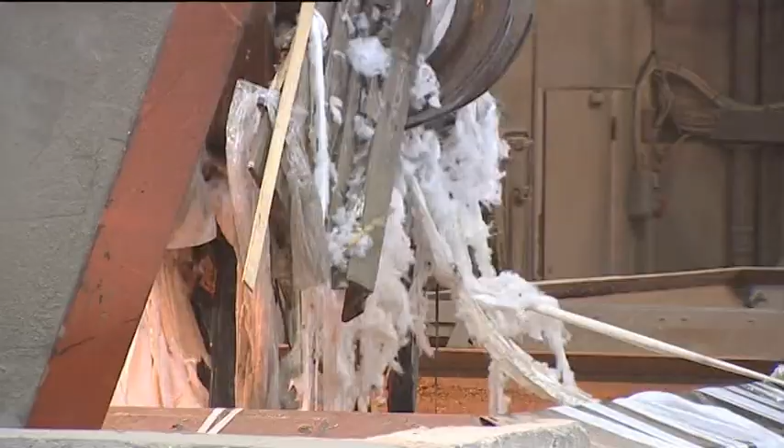There are also many waste materials which can be reused or recycled. Such waste has a value and should not be burnt. Where incineration is the best solution, it is vital that the waste is burnt safely and efficiently, at a high temperature and with a sufficient supply of oxygen to ensure complete combustion of all toxic components, and that the combustion gases and particles are filtered and separated before the clean exhaust gas leaves the chimney.

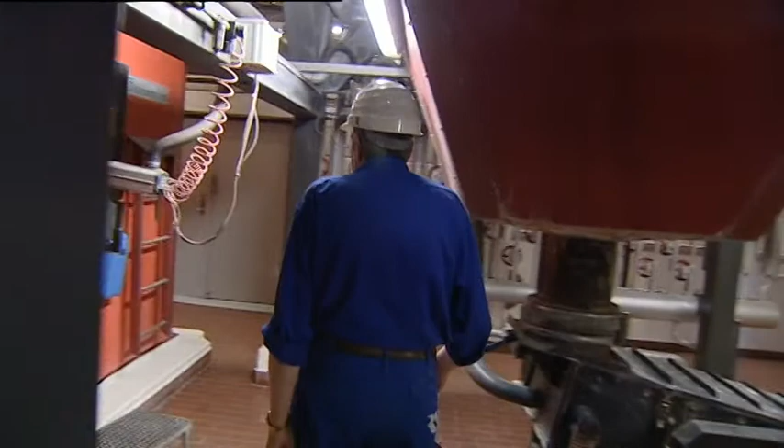Renosyd operates an incineration facility in Skanderborg. This is a combined heat and power generation plant. The heat energy from the incineration process is used to produce both electricity and hot water for district heating. The facility comprises two furnaces. The first was built in 1984 and the second was added in 1992.

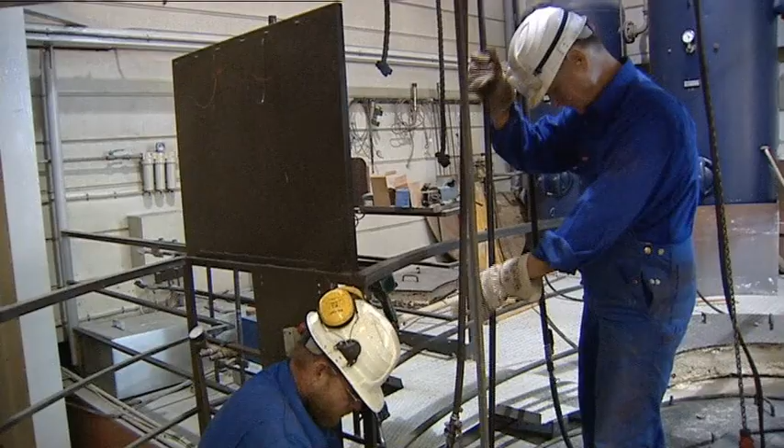The facility is continually upgraded to comply with the increasingly stringent requirements for the efficient and environmentally responsible incineration of waste. For the local community, this approach represents an annual saving of approximately 22 million litres of oil or 33,000 tonnes of coal, which would otherwise have been consumed to deliver an equivalent supply of electricity and district heating energy.

The incineration plant supplies electricity to approximately 4,500 households and district heating to approximately 6,000 homes. And because the waste would be burned anyway, the cogeneration approach represents an annual reduction of CO2 emission by 66,000 tonnes.

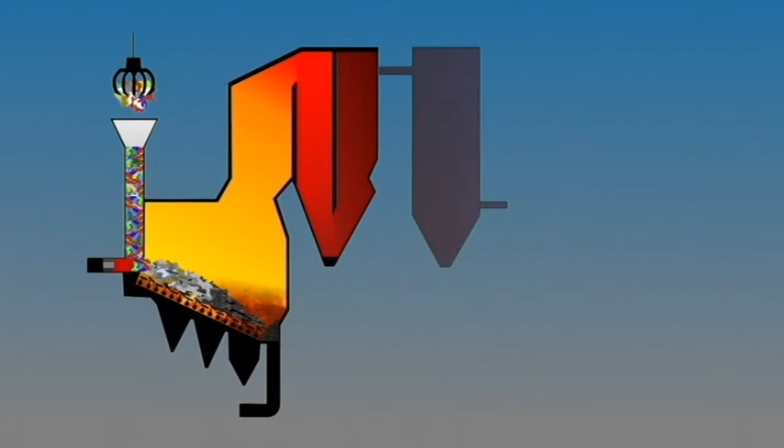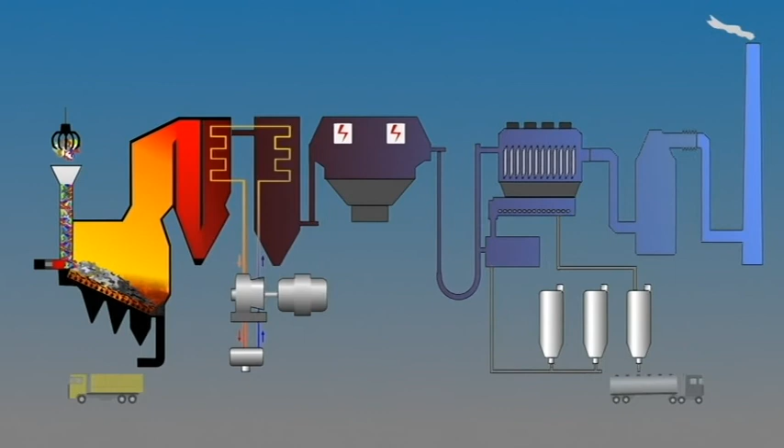An incineration plant is essentially a big furnace, with many ancillary systems to control and monitor the combustion process, and to limit the emission of toxic gases and particles in both the exhaust smoke and the residual ash. To ensure a clean and efficient combustion, it is necessary to keep the furnace burning continuously. Therefore, the facility operates 24 hours a day.

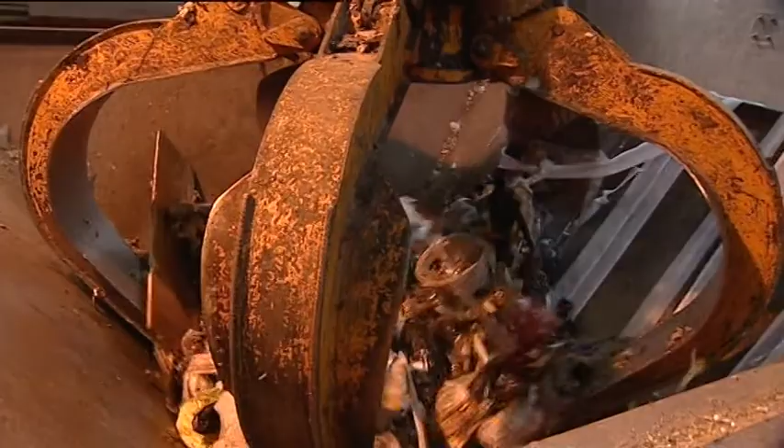Approximately half of the waste for incineration comes from domestic households. On their way in and out of the facility, the refuse trucks are weighed so that the weight of the refuse received may be logged.

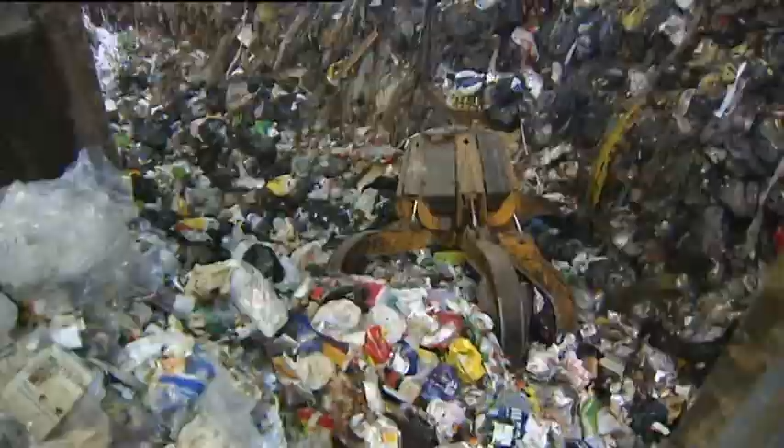Though refuse is only delivered during working hours, the furnaces run continuously. Therefore, the waste is first tipped into the silo, where there is capacity for several days' incineration, so that operation may continue during weekends and public holidays.

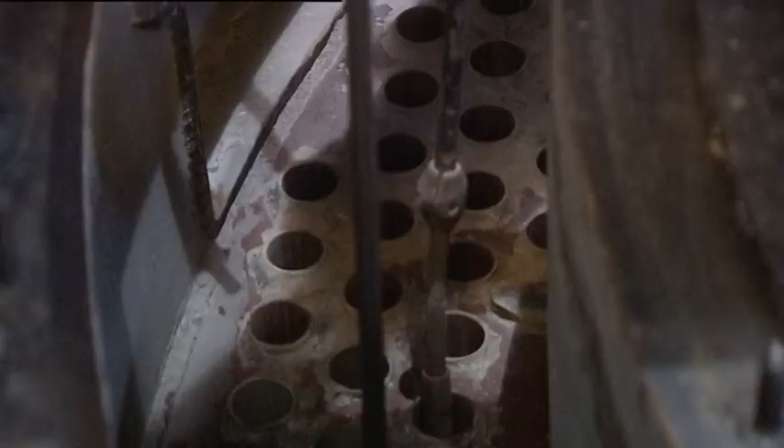The plant is shut down for maintenance for a week or two each summer, always at a time of low demand for district heating. Large quantities of auxiliary fuel, typically oil, are necessary when restarting the furnace after maintenance shutdown. It takes several hours before the required temperature for incineration is achieved.

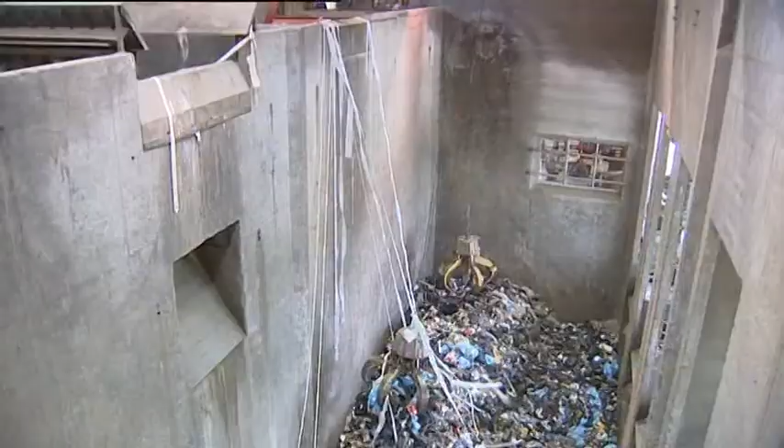Domestic waste must be sorted at source by the householder, so that only materials that are suitable for incineration are put into the refuse container for collection. Almost all domestic refuse goes directly to incineration. Therefore, unlike many industrial operators, we're unable to control the quality of our raw material. Instead, we must trust our suppliers, the public.

A battery that is delivered along with household refuse is a problem. Batteries do not burn well, and we must use extra resources to remove the toxic residue from our system. It is for this reason that waste management companies like Renosyd make an effort to persuade private householders and businesses to sort their waste, so that only suitable materials are incinerated.

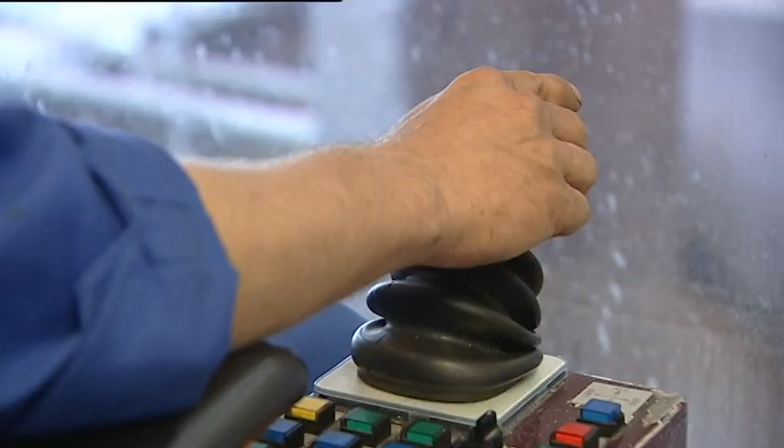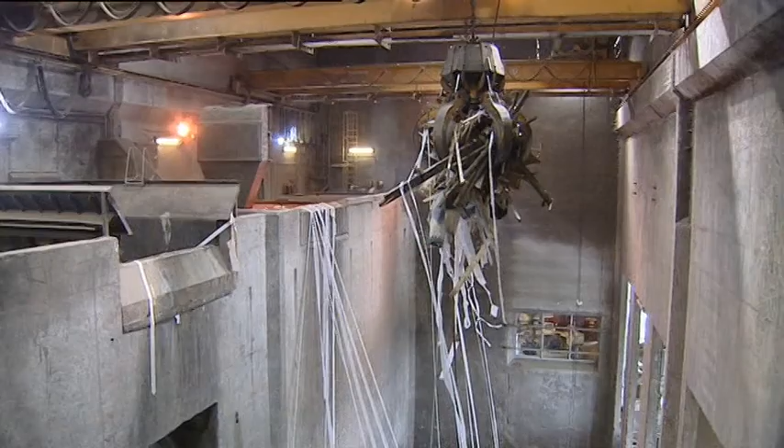The operators in the control room have an overview of the entire facility, with the aid of 2 grab cranes. They are able to move the refuse around in the silo and onwards to the furnaces. The furnace must be fed continuously, and the different types of waste in the silo are mixed, so that easily combustible material such as wood is mixed with wet household refuse to achieve the optimal mixture for an efficient incineration.

The refuse is lifted by the crane from the silo to a loading hopper at the top of the furnace. Once it passes into the furnace, it is impossible to see, as the furnace is enclosed because of the high temperature.

The refuse falls onto a moving grate, and the grate elements oscillate alternately to spread the refuse evenly and move it downwards through the furnace. A primary blower underneath the grate forces air up through the furnace, bringing the temperature up to between 1000 and 1200 degrees centigrade. The refuse dries rapidly and burns easily.

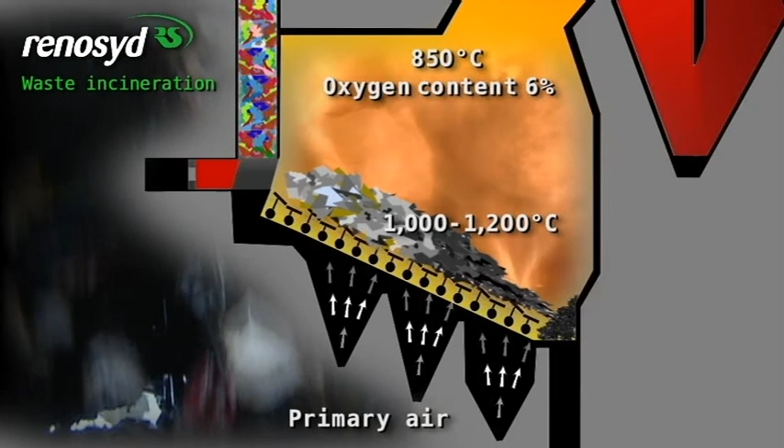Under combustion, the refuse gives off many toxic gases and particles. The furnace is designed to maintain a combustion gas temperature exceeding 850 degrees, with an oxygen content of 6% to ensure complete combustion of the gases before they leave the afterburner zone above the furnace. The combustion gases are pulled onwards through the system by suction fans.

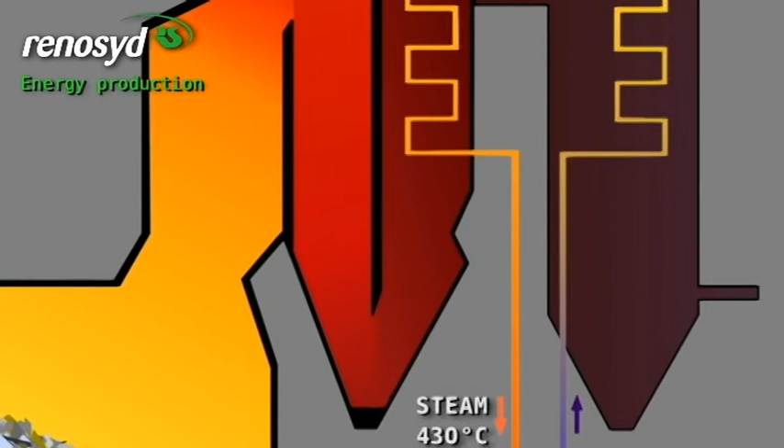The hot gases then pass through a boiler, a system of vertical chambers surrounded by water pipes. Here the water is heated to steam with a temperature of approximately 430 degrees, and under high pressure is fed to a turbine. The high pressure steam drives the turbine, which in turn drives a generator that produces 3 megawatts of electricity.

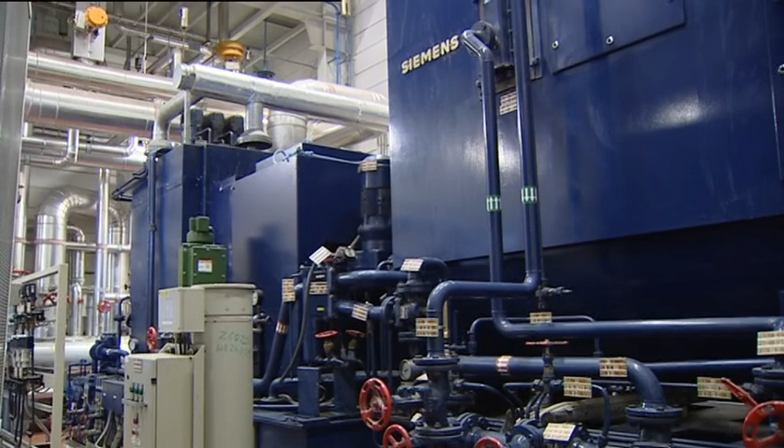The generator is connected to a transformer from which electricity from the incineration plant is distributed to the public electricity network. After passing through the turbine, the steam is piped through a heat exchanger, in which the steam heats water from Skanderborg's district heating network.

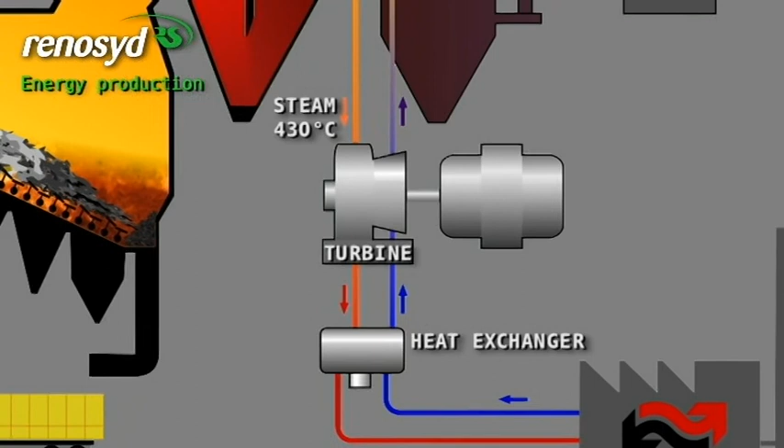The district heating water is heated from approximately 40 degrees to approximately 90 degrees, before it is pumped out to households in the town. The steam is cooled in the heat exchanger and is condensed to water again, after which it is pumped back into the boiler.

The water used in the incineration plant is rainwater recovered from surface drains around the facility, and almost all the water discharged from the facility is recovered and used again.

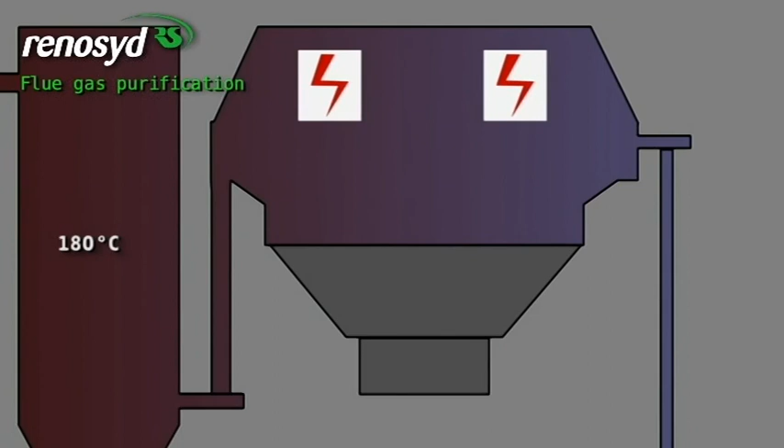The combustion gas leaving the boiler has now cooled to around 180 degrees. The gas still contains many toxic gases and fine particles, which must be removed before the flue gas stream is released into the atmosphere. The gas flows through an electrostatic precipitator, in which particles and smoke are removed from the flue gas stream by an induced electrostatic charge.

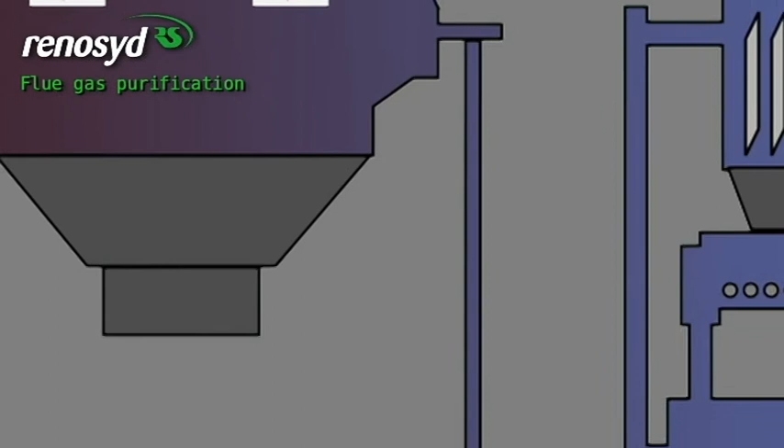The flue gas stream is then passed through a reactor, in which lime and activated carbon are added. The lime absorbs acids in the flue gas, particularly hydrogen chloride and sulfuric acid. The activated carbon absorbs toxins such as mercury and dioxin.

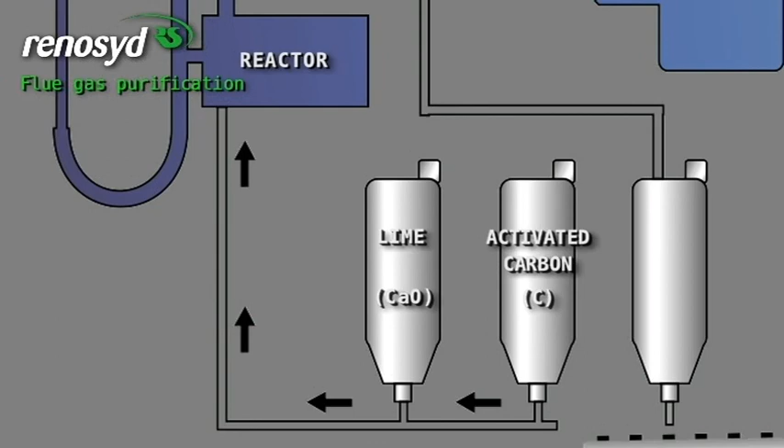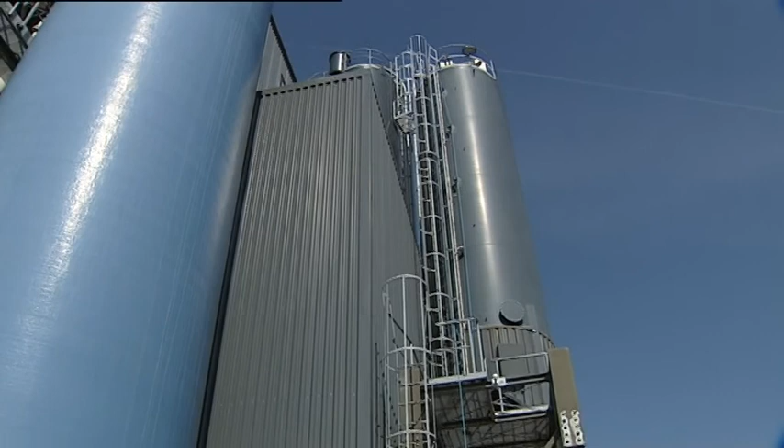From the reactor, the exhaust gas stream passes through a baghouse filter, an arrangement of 960 filter bags that catch many of the remaining particles. The particulate byproduct is moved with compressed air to a sealed silo, from which it is collected regularly by tankers and trucked to Germany, where it is used as fill material in disused salt mines.

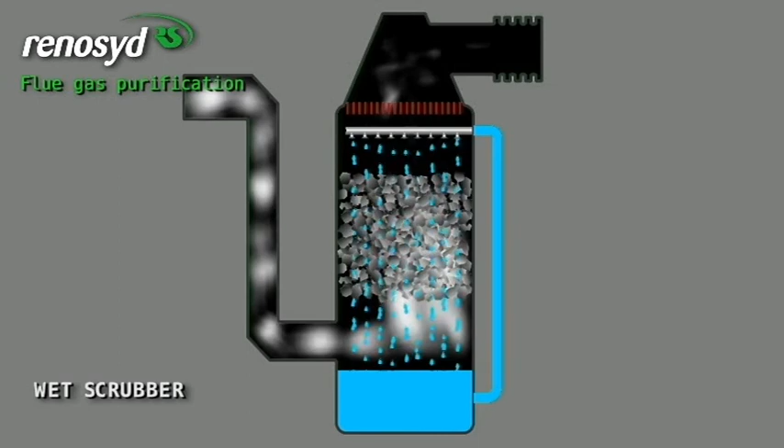From the baghouse filter, the flue gas stream is passed through a wet scrubber. Here a fine spray of water removes the remaining particles and toxic gases. This process also cools the flue gas stream to around 60 degrees and consumes through evaporation approximately 100 cubic meters of water a day.

Rainwater gathered from the surface and drains around the facility supplies the entire process, including the scrubber. The only wastewater which is fed into the public sewers is from the administration building.

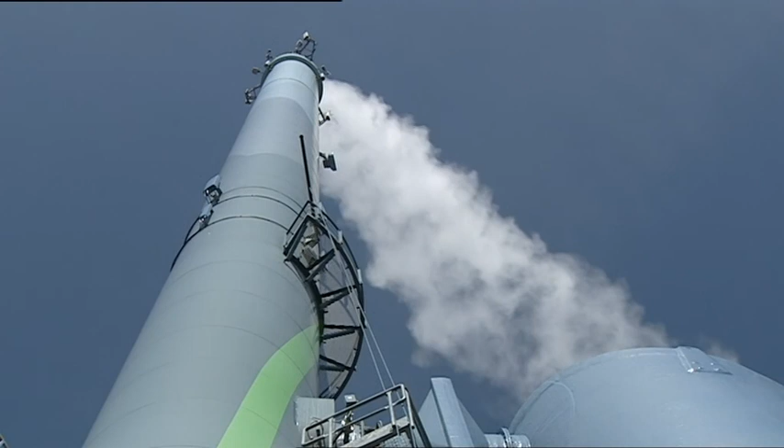When the flue gas stream has passed through the various filtration systems, it is clean enough to be released into the atmosphere. The exhaust temperature at the top of the chimney is approximately 60 degrees.

Contrary to popular opinion, the smoke from the top of the chimney is not smoke. It is mostly steam. The chimney at the incineration plant is a local landmark, by which all can see for themselves which way the wind is blowing.

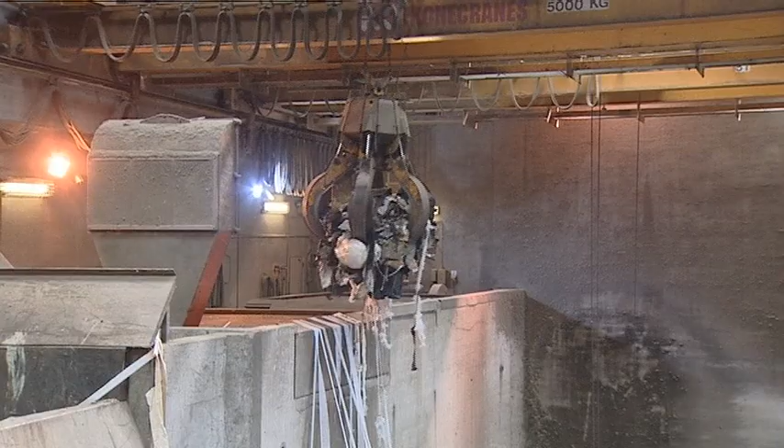Every year, the incineration facility in Skanderborg handles 60,000 tonnes of assorted waste, which results in approximately 10,000 tonnes of bottom ash from the furnaces and around 1,800 tonnes of particulate byproduct from the filters.

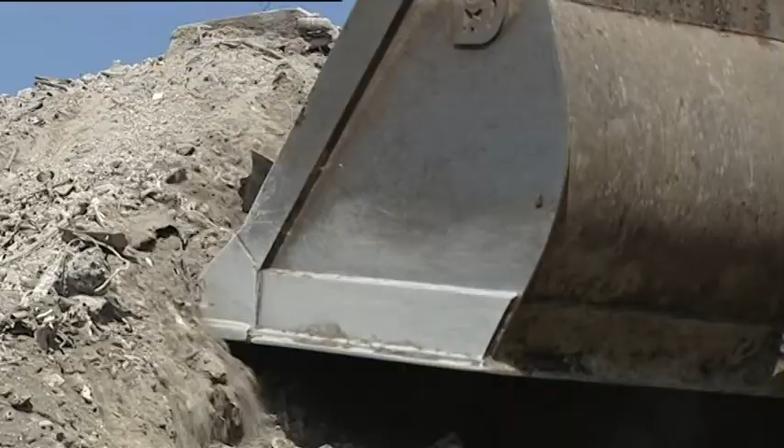Most of the bottom ash is recycled. Once the residual metals have been separated and sent to recycling, the residue is crushed and sold as construction aggregate, typically for road building.

The incineration process is monitored and controlled from start to finish. The operators monitor the temperature and composition of the exhaust gases throughout the entire process to ensure that all emissions regulations are adhered to.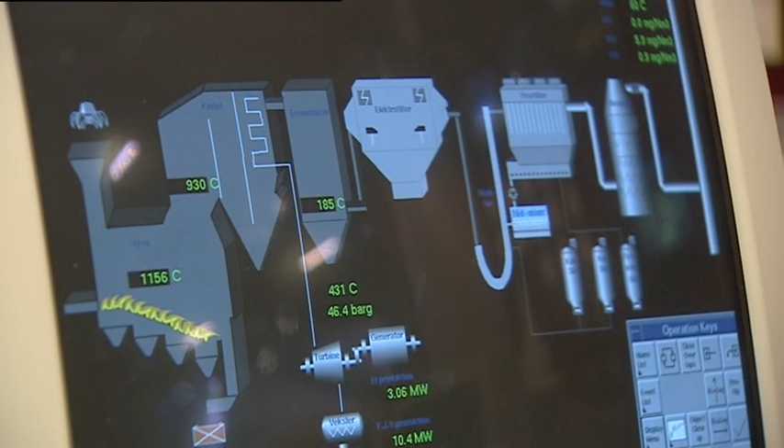Like all industrial operations, Renosyd is subject to the strictest environmental and health and safety controls. We are environmentally certified under the EMAS system, and our activities and records are independently audited to ensure that our environmental goals are met and that planned environmental improvements are implemented.

The incineration facility is maintained and upgraded regularly to ensure operation in accordance with high environmental standards.

If all the waste that can be reused or recycled or that requires special handling and processing were separated at source, we would still need incineration.

Incineration is an environmentally responsible method of waste disposal. Thanks to modern technology and know-how, the waste is incinerated under controlled conditions, thus avoiding the many environmental and safety issues associated with illegal domestic incineration.

And incineration gives something back to the community in the form of electricity and district heating, reducing our dependence on fossil fuels. At Renosyd, we know which way the wind is blowing.